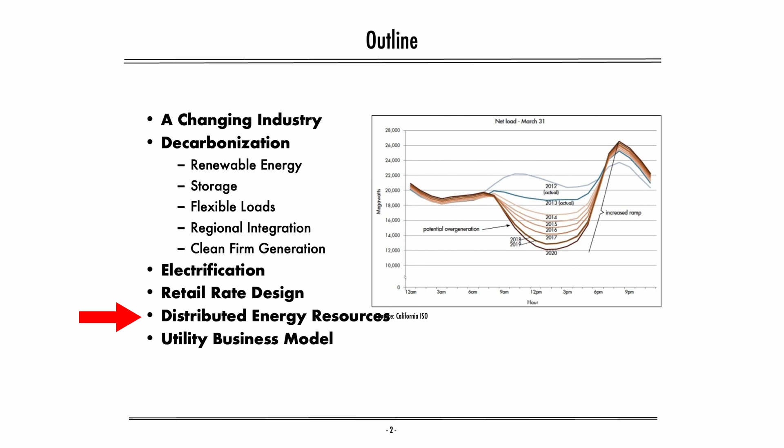So some of the big picture topics I'm going to talk about today are decarbonization, some different strategies for decarbonizing the grid, and things related to that - overall growth in electricity demand, how we charge customers for electricity, and how distributed resources play a role, resources not owned by utilities or government agencies. Hopefully we'll go through all of that.

So I think from a big picture perspective, the electricity sector is very unique. If you think about all the sectors in the economy, how many have been around for over 100 years that are still in existence? How many industries have grown and died? How many have been around that long and are still poised for exponential growth? There are very few industries that have been around that long and are poised for the transformation and growth that the electricity system is going to experience in this country and the rest of the world over the coming decades.

So I think it's a very exciting industry to be a part of because there are all these challenges associated with it. How can we meet this load growth? We'll talk about the sources of that load growth in a little bit, but they're changing almost faster than you can keep up with.

It used to just be, oh, we have electric vehicles and we're going to electrify buildings. Now we have data center load growth, artificial intelligence, cryptocurrency - all of these things adding up to enormous load growth. So how can we meet those increasing demands while decarbonizing, while keeping costs reasonable, while recovering those costs fairly, while doing all of that reliably? There's a lot of challenges, but I think those challenges are what make this industry very exciting, stimulating and fulfilling to be a part of.

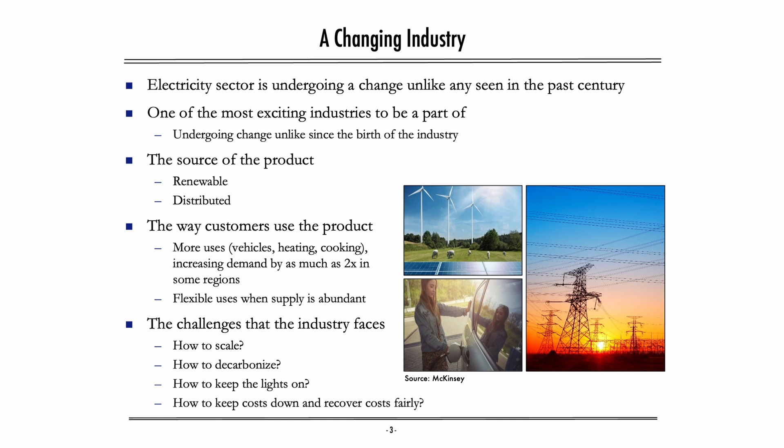So some of the changes against that backdrop that are happening in the industry that we're going to talk about are the source of where our electricity comes from. Historically, it was very large-scale, centrally owned fossil fuel power plants. Now the source of electricity supply is becoming more renewable, slanted towards wind and solar, and more distributed - not just centrally scaled, very large plants, but potentially rooftop solar or other smaller community solar type installations. And then the way that customers use the product as well.

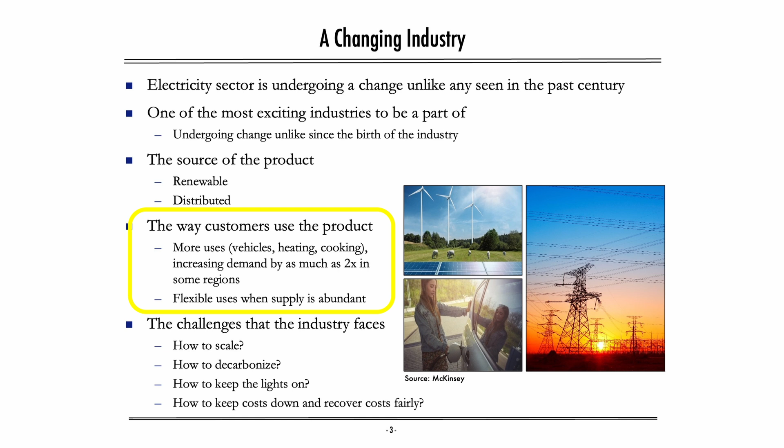This is in part what's driving all of the increase and forecasted increase in demand. The things that we use electricity for are becoming more and more prevalent. 30 years ago, if the electricity went out, maybe you couldn't turn the lights on or watch TV. Now, if the electricity goes out, you can't do any of those things. Plus, if you work from home, you can't work. If your home's heated with electricity, you won't have a warm home. If you charge your car, you can't charge your car. So the impact of electricity is becoming more and more prevalent in our lives, which puts even more emphasis on having a reliable grid and the impacts when we don't.

So lots are changing in the ways in which we use the product of electricity, and we'll talk about all those things. But I do want to first take a step back and look at decarbonization and why this is critical for the electricity sector.

From a big picture perspective, not even focusing on electricity, we emit a lot of greenhouse gases. Scientists have said that if we want to keep climate change to a reasonable level, defined as warming of no greater than 2 degrees Celsius, there will have to be greenhouse gas reductions of approximately 80% below 1990 levels within the coming decades. That's rough math, but more or less the scale of decarbonization needed to prevent the worst impacts of climate change.

So if you look at where all those greenhouse gases come from, about a quarter of them, at least in the US, come from the electric power sector. You can see a pie graph there on the right. Electric power is now the second biggest sector behind transportation, things like cars. Electric power actually used to be the largest, but there have been some recent emission reductions in electricity.

Generally electricity is kind of a double-edged sword, but it's probably the easiest sector to decarbonize. Even though it's challenging, it's probably easier relative to something like buildings, cars, or industry. A lot of that has to do with the fact that there are only a limited number of players in the electricity sector, so you can regulate and say utility A, do this thing, and they'll go do it. Whereas if you're trying to decarbonize industry, where there are 1,000 different companies, or transportation, where there are millions of individual customers, you have to deal a lot more with consumer behavior and other things.

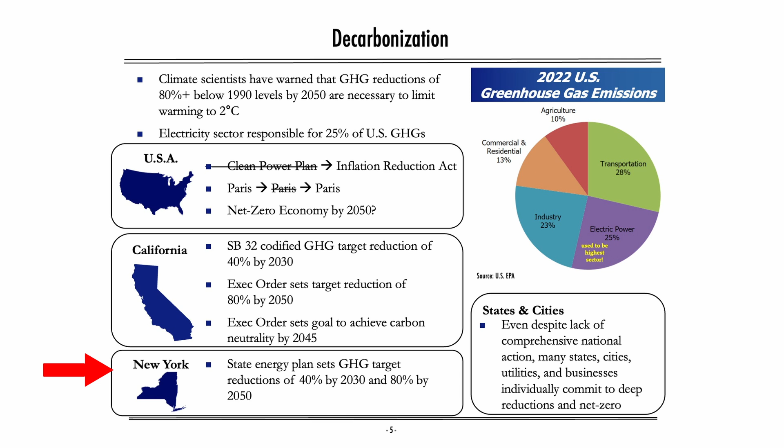But I think another double-edged sword of decarbonization policy is that within the electricity sector, most control of decisions around policy, utilities, and what resources get built doesn't actually happen at the federal level—it happens at the state level. So in California, we have different decarbonization targets written in law: 40% reductions by 2030, 80% reductions by 2050. New York has very similar goals. And even many cities that exist within red states also have decarbonization policies.

So much of the United States does have very aggressive decarbonization policies, even if there's no unifying federal decarbonization target. That means even if there are federal transitions one way, there's this natural buffer of policy at the state level—and it cuts both ways. That's a lot of what's driving a lot of the individual actions at local levels.

And beyond that, even if you have no policy in place, individual customers can make their own decisions to decarbonize. So if you look at a state like Texas that has very little policy, there's still tons of renewables in Texas, and a lot of that's driven by raw economics, but also customer choice as well.

This is kind of what, if we want to decarbonize, the magnitude of decarbonization needs to be—most of the greenhouse gases need to be reduced.

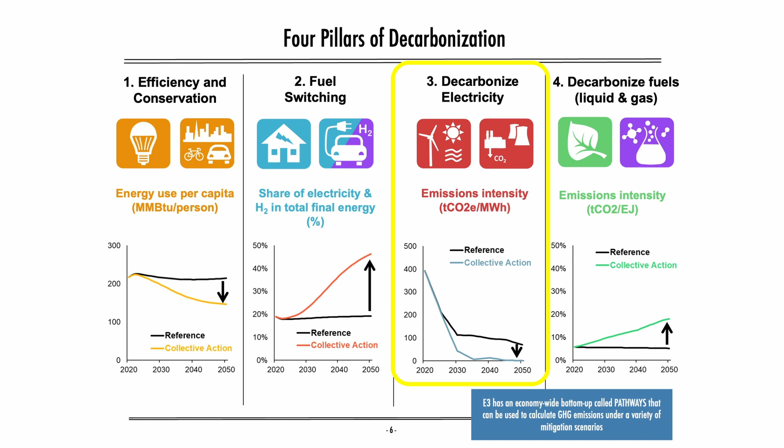I promised we were going to focus on this third pillar of decarbonizing electricity, and specifically talk about some of the challenges of using renewable energy to decarbonize the electricity system. So why renewables? Well, the primary reason that there is a lot of support and inertia for renewables relative to other sources primarily comes down to cost.

Renewables, as I said, when I was at Stanford, solar cost $250 a megawatt hour. A couple of years ago, solar cost $25 a megawatt hour. Now with interest rates, it's gone up to $35 a megawatt hour.

But still, it's roughly an order of magnitude lower than it was, and the same is true for wind. Particularly in the United States, we have tons of land, way more than most places. We are very lucky. Look at other countries like Japan, Taiwan, or parts of Europe - they're very much land constrained. In the United States, we have a lot of resource potential and we can build a lot of renewables at low cost.

At least historically, there was a lot of public support for renewable energy development. I think one unique thing emerging now that we need to grapple with is there's becoming more and more pushback against renewable development. There's basically pushback against development of everything - nobody wants any new fossil, nobody wants any new renewables. It's very hard to build transmission, it's hard to build anything. And it's like, okay, what do you want? What are we supposed to do here, short of just shutting down our economy? So historically there has been a lot of public acceptance of renewables, but there's increasing pushback against that, which presents a separate set of challenges.

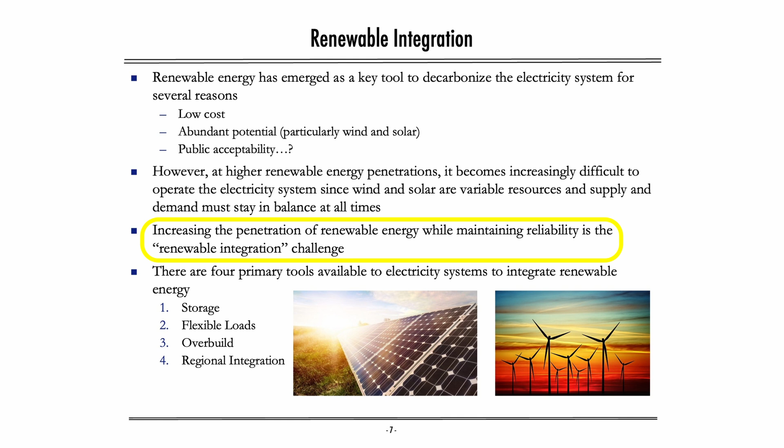But let's suspend that for a minute and assume we can actually build the renewables we need to build. The question then is, how can we actually use those renewables to decarbonize the electricity system? The primary challenge with renewables is that they produce energy when the sun is shining and when the wind is blowing, and that's not always lined up with exactly when we need them to be producing. So the challenge of matching supply with demand when we need it is the renewable integration challenge. There are a couple of different strategies for addressing this, which I'll talk through.

From a grid operation perspective, a key principle that has to be met to keep everything working is that whatever electricity demand is, the electricity grid has to produce that amount of energy or generation to match demand exactly. If demand and generation do not match, the grid will break, or there will be blackouts, or bad things will happen. So utilities or grid operators have to match energy generation to demand in every hour of every day of every year.

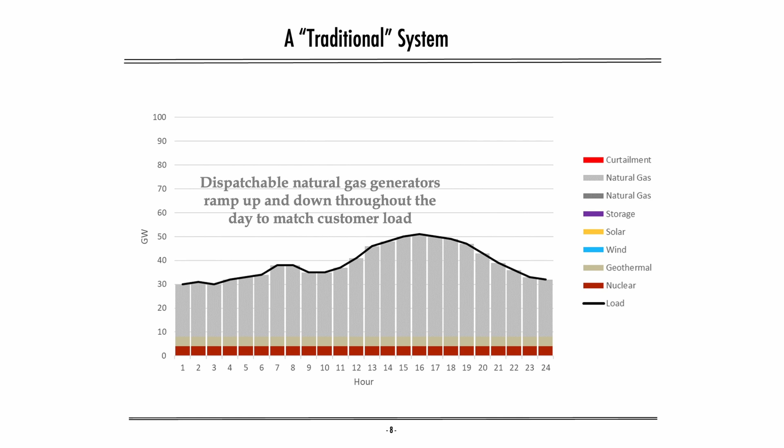You can see what we've done by adding renewables to this system is the total area of gray has gone down. And that total area is really the generation from natural gas, which is what leads to emissions. So if we're trying to decarbonize, we're trying to reduce the area of natural gas. We've gone from a lot of natural gas to less natural gas.

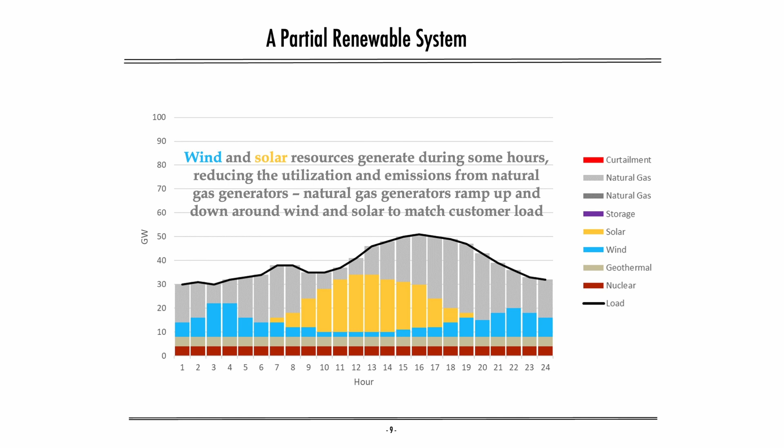So you say, okay, this is a great decarbonization strategy, let's just keep building more wind and solar. So what happens if you do that? Well, if you just keep building wind and solar, you can see these mismatches start to become more and more pronounced. If we just build a lot of solar, for example, what happens is that we now have hours in the middle of the day where total generation is exceeding load.

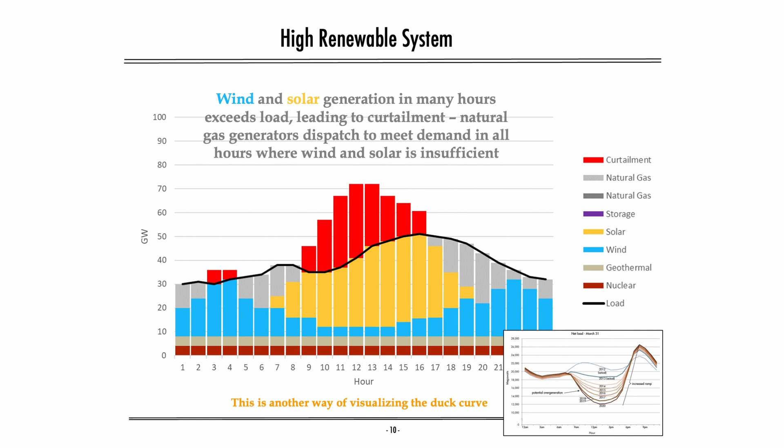But then simultaneously in the evening after the sun sets, there's not enough renewables to meet load, so natural gas generators have to ramp up. So the challenge here is that if we just keep building more and more renewables and do nothing else, there's going to be mismatches between when those renewables are producing and when we're consuming electricity, in a way that is not going to allow the system to fully decarbonize and will simultaneously result in wasted renewable energy.

So what are the solutions to this? This again is the integration challenge. So what are the solutions to fixing this issue and allowing renewables to decarbonize the grid?

Well, the first most obvious solution that probably everyone's thinking of right now is let's build energy storage. And that's a very elegant, simple solution. If you just build some batteries, in the middle of the day when solar is producing more than the grid needs, you charge those batteries. And then in the evening, instead of dispatching natural gas, you dispatch batteries, because batteries are something that, like natural gas, can be turned on and off. So what does that look like? That just looks like building some batteries.

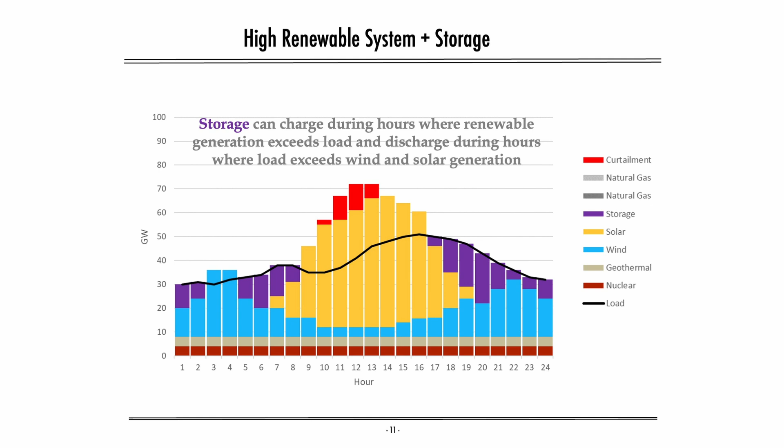So seems like an easy answer, right? But what's the challenge with this? There's lots of challenges, but one is the fact that batteries cost money. They're definitely a lot cheaper than they used to be, but they still cost money. So even though this is a technically feasible solution, it doesn't mean it's the most economic solution.

So what would be another alternative to helping match up demand and supply that avoids building this amount of batteries? Well, one solution would be to just change the way in which we consume energy or electricity. If we could consume electricity in a way that increases consumption in the middle of the day when there's a lot of solar on the grid, and decreases consumption in the evening when we would be dispatching natural gas plants, that could potentially be a way to reduce emissions that avoids having to build batteries. And we would want to do that if it's cheaper to modulate the way in which we consume energy than it is to make investments in resources like battery storage.

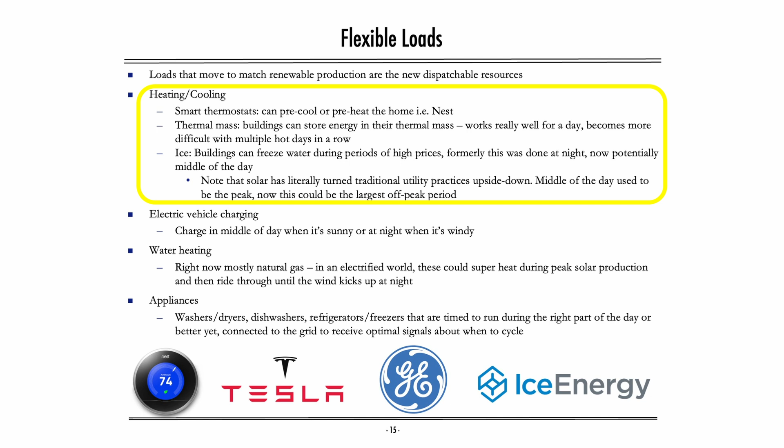But many loads can be flexible. So if you think about cooling your home, typically the way that works today is people go to work, they're not in their house because they're not home. Of course, they're not going to run the air conditioner. Why would you be cooling an empty house? So throughout the day, the home is heating up. Then they get home and they turn their air conditioner on.

And the house has to come back down to a very cool level right in the evening. Well, maybe it would actually be better for the home to pre-cool itself while the person's not there, get down to a very cool level, and then when the person actually gets home, the home's already cool and doesn't need to use as much electricity in the evening. So it's a strategy for shifting the time of day in which the home is cooling itself in a way that is more aligned with when the grid actually has low cost, low carbon energy available.

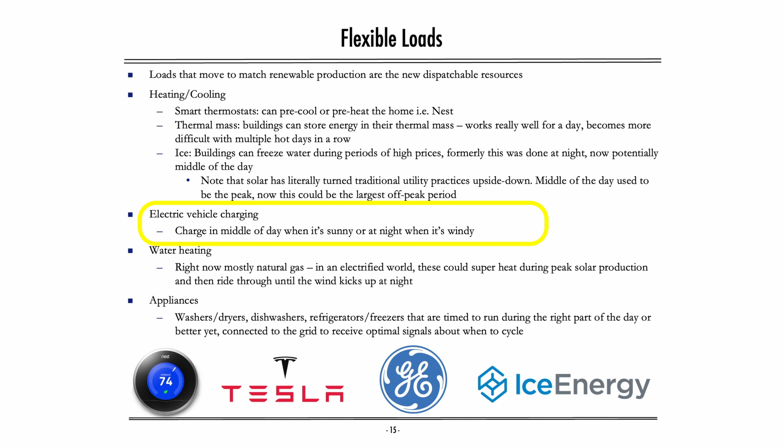That's just one example. Another example is car charging. So instead of, a typical base case scenario would be you buy an electric vehicle and you drive around all day and then you come home at 5, 6 p.m. and plug your car into your garage. Well, maybe a better solution would be if you drive your car to work, charge your car at work all day, and then come home, don't charge it, then go back to work the next day and charge it. So you're always kind of doing the base load charging at work in the middle of the day when the sun is out. That's just another strategy that California is looking at.

There's all sorts of strategies for loads that can be shifted. Again, not everything can be shifted, but many things can be shifted, whether it's when we heat and cool buildings, when we charge cars, when we use appliances. The smarter those appliances are, the easier it becomes to shift them around, right? We don't want us as consumers tinkering with these things and monitoring the thing. If you can just say appliance, run at the best time for the grid and for my electricity bill, and it will just do it.

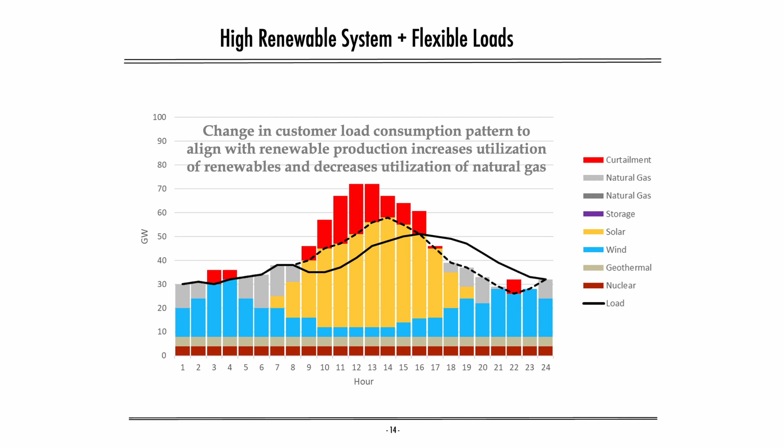So that is for flexible loads, that's some examples. And so again, flexible loads are just shifting how we use electricity in a way that better lines up with when renewables are producing.

So those are two strategies. I promised you four. So what's the third strategy? The third strategy is a bit unintuitive. And what the third strategy is, is actually kind of what I said not to do at the beginning. But what if we just keep building renewables? What if we just take this and just keep building more? And on the one hand, this seems like a bad solution because we get more and more curtailment, right?

That red sort of wasted energy. But on the other hand, it really is an economic question. If in fact it's cheaper to keep building renewables than it is to do other integration strategies like battery storage or flexible load, then this could be an economic part of the integration solution. And I put this here not to say that this is the answer or that we should do this instead of building battery storage or instead of using flexible loads. The reality is that a least cost electricity system is going to do all of these things to a certain degree.

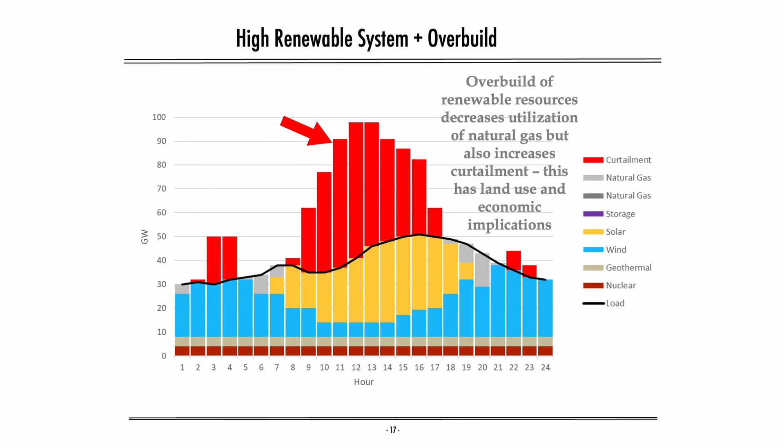And the point is that if you look at a cost minimal system that has a lot of renewables and is deeply decarbonized, there is going to be some curtailment. We don't need to worry about eliminating all of the red excess generation on the system. Sometimes there's going to be that during certain times of year or certain times of day. That is part of a least cost solution. So I think that's also something that is not initially intuitive when people think about decarbonizing the electricity system, sort of accepting that a least cost solution is going to involve certain hours of the day or of the year where we're curtailing renewables, and that's okay.

And increasingly, if we can get more and more flexible loads that can figure out things to do with this potentially free energy, then that's going to be something that emerges as well, right? There's a lot of new loads that are extremely flexible, like hydrogen or cryptocurrency, etc. And to the extent that those loads can figure out something to do with that energy, then that's fantastic as well.

So that's the third solution. And then the fourth solution is also kind of a bit unintuitive, but it's what if we change the geographic scope of the grid? That is something called regional integration.

Right now, at least in the Western US, we have a very fragmented grid. We have about 38 different balancing authorities covering the western half of the United States that are all operating relatively independently. There are increasing movements to better integrate those that are actively underway right now, but at least historically, they've operated very independently.

The benefits of more tightly integrating all of those together are that there is a lot of regional diversity in how renewables produce energy. So for example, it's generally not cloudy everywhere. If it's cloudy in one place, it might be sunnier in another place. If it's less windy in one place, it might be windy in another place. The broader the geographic area you can aggregate renewables over, the smoother those renewable production profiles become.

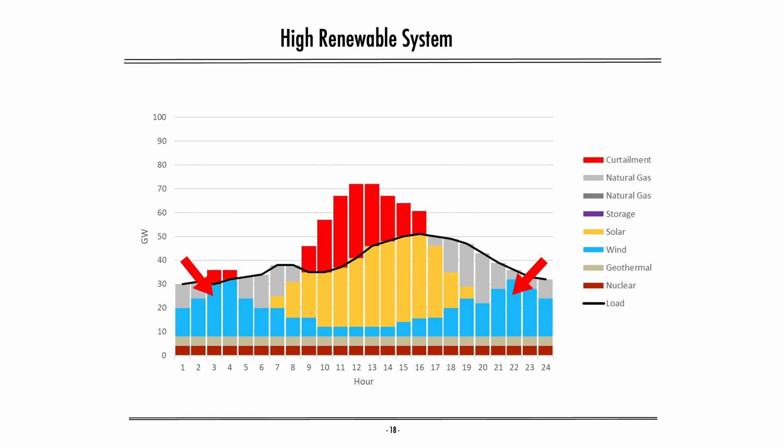This is illustrative, but the point still stands. Here we have a tip, this is like one place on the electricity grid. We have sun that's rising and setting with the sun at that place on the grid. We have wind that is relatively volatile, right? We have a lot of production in the morning, it ramps down in the middle of the day, ramps up production in the evening.

But if we were to aggregate over a much wider geographic area, those profiles become smoother, right? Particularly for solar, you now have multiple time zones where the sun is kind of overhead for longer because it's rising earlier in the morning, setting later in the evening when you look at multiple time zones. And wind, there's just more ability to balance out low production areas with high production areas.

Another eccentricity of the grid in the United States is that it's actually 3 different grids. We have a Western grid, an Eastern grid, and Texas. I think probably you covered that. Those are electrically separate, but if we could somehow interconnect those grids more closely, there could be a lot of benefits.

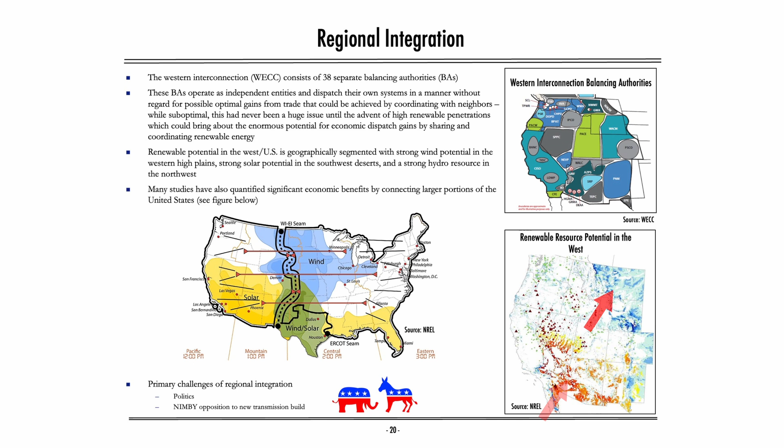Even if you look in the West, say we're never going to connect the West with the East, but if we just look at the West, we have a lot of solar down here, a lot of wind up here, and then the Pacific Northwest is probably the hydro capital of the world. So if you could find ways to allow those to all work together, that's going to decrease the need to do everything else, right? Decrease the need to overbuild, decrease the need for energy storage, decrease the need to do flexible loads.

But a lot of the challenges of regional integration are not a technical challenge, they're a policy challenge. So even in the West, you have states that don't want to be associated with each other.

California does not want to be associated with coal-burning Montana, and coal-burning Montana does not want to be associated with hippie liberal California. So getting an acceptable governance structure for a West-wide grid is challenging.

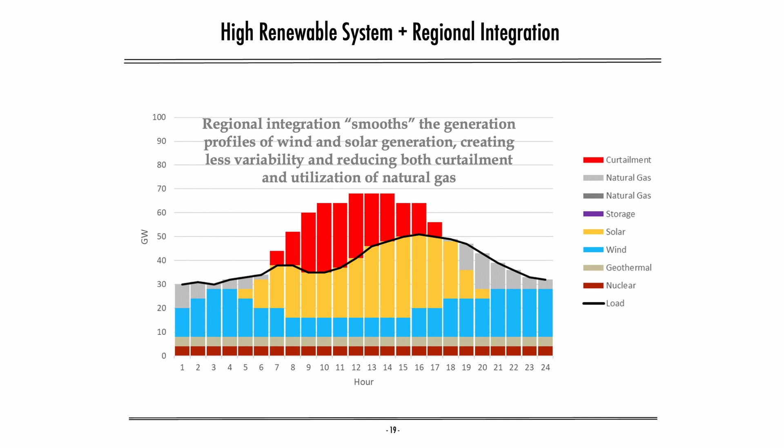The final thing I want to talk about from an integration perspective: we've gone over the general challenges and strategies, but it's important to note this is just one day. We've been focusing on one day, which is good for getting the concepts down, but every day is vastly different. You have days where it's really hot and people are using a ton of air conditioning, so loads are very high. You have days where it's cloudy and not windy, so solar and wind output are both less. All of these things are moving around all the time.

From a reliability perspective, which is keeping the lights on, that's an all-the-time problem. You can't say, 'well, it's cloudy today, so we're cutting off electricity.' So it becomes necessary to look at all the potential conditions that could happen on the grid. That's where the last integration challenge comes in—and probably the thing I personally focus on most and think is coolest—the need for firm generation, particularly clean firm generation.

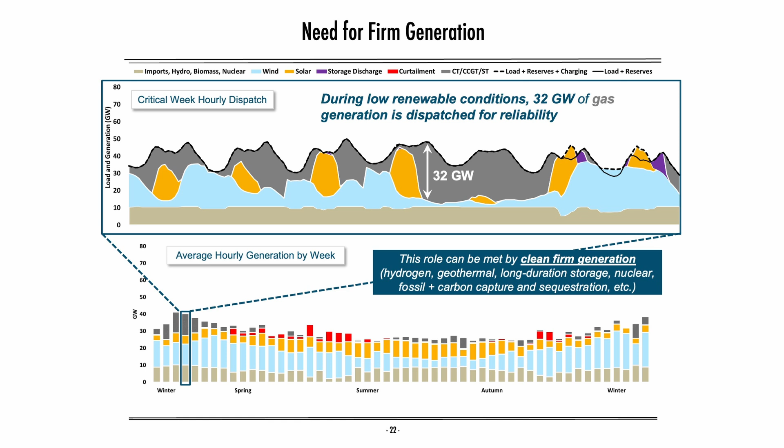The problem is, what would that look like? If we build wind and solar for the worst week, on all the other weeks where we already had enough, now we have way more than we need. That leads to all the extra curtailment shown here in red. So is this an economic solution? Probably not. Not only is it wasteful to build more wind and solar, but it also takes a lot of materials and a lot of land. So beyond economics, there are also environmental implications of more materials and more land.

This is the New England study I've been referring to, and this is kind of what that looks like. If you plug everything I just talked about into an optimization model, and say, I know I need to meet electricity demand in every hour of the year, these are the resources I have at my disposal, taking into account all their variable production profiles, and I want to do it in a least cost way—what's the optimal mix of resources? This is what an optimization model will output.

This is another common type of analysis done in the electricity sector. One key takeaway is that a least cost system has a diversity of resources—there is not one least cost resource. You'll often read articles saying this resource is now cheaper than that one, but that's not really how it works. Resources are cheapest when they work together, because they have different characteristics. Comparing the cost of natural gas to solar, or coal to gas, or coal to solar, or coal to wind, is something the press loves to do, but these resources have such different characteristics that it becomes a meaningless comparison. In fact, a least cost system has a diversity of resources.

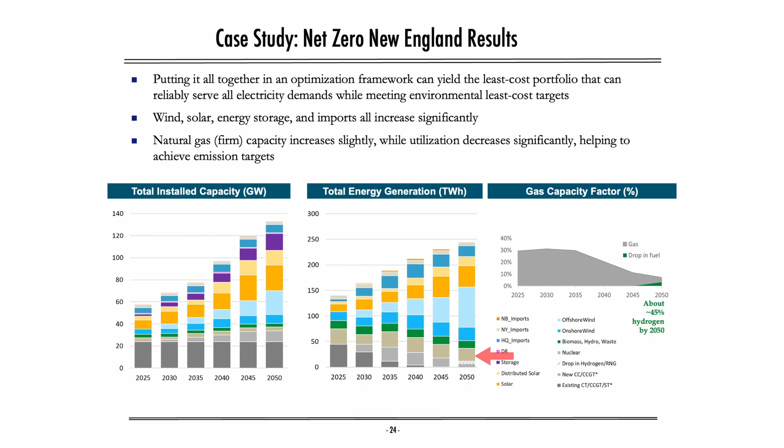Just because you have a resource installed doesn't mean you generate energy from it. We need a large base of dispatchable capacity that's actually growing over time for reliability, but because we're building renewables, we can use that less. Using a resource like natural gas is what creates emissions, so we should focus on reducing its usage, not its installed capacity. Because when you need it, you need it—when the wind and solar stop, you'll be glad you have it.

That's an overview of decarbonizing the electricity supply. Now I'll jump to the other side of the equation: electricity demand, particularly electrification.

From an economy-wide perspective, decarbonizing the economy likely requires significant fuel switching: transitioning gasoline and diesel-powered cars and trucks to electric ones, and transitioning buildings heated with natural gas or oil, or that use gas for water heating. All of those can be readily electrified—there are electric vehicles for transportation, and the workhorse of the building sector is the electric heat pump, a very efficient way to heat buildings with electricity.

Then there's one my mom's least favorite: transitioning gas stoves to electric stoves. Cooking is a small percentage of total building gas use compared to heating and water heating, but it's the most controversial—there are restaurant unions and organizations protesting getting rid of gas stoves in Los Angeles and other cities around the country.

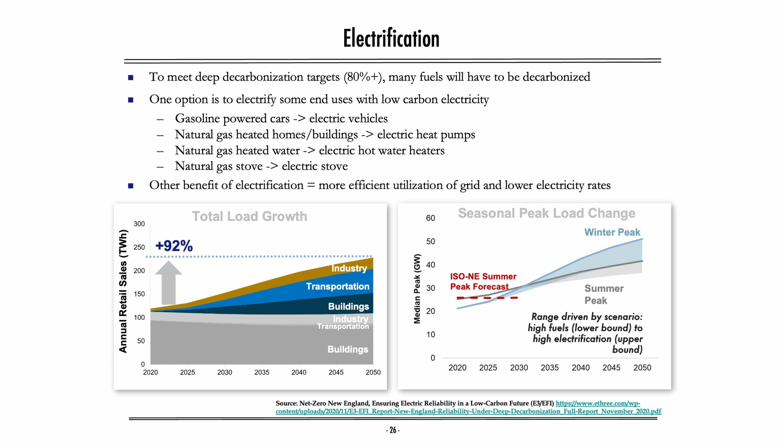This graph on the left shows the change in electricity demand between now and 2050, from the same New England case study we've been discussing. The gray bars represent existing electricity demand, and the colored sections show sectors experiencing growing demand—primarily buildings, transportation, and industry. New England doesn't have a huge industrial base, so there's less industry to electrify there compared to, say, Texas or China, which have more potential for industrial electricity demand growth. But in New England, it's primarily transportation and buildings driving the increase.

That's something like a 92% increase—close to doubling electricity demand. That's a lot, particularly in a place that doesn't have much land and is very averse to new development, similar to everywhere else. So we have this growing demand, but we don't want to build anything new—at some point, something has to give.

The other thing about increasing demand and load growth is that it's not just the total quantity that's growing, it's also the nature of how it's growing. Right now in the U.S. and most grids worldwide, peak electricity demand—which from a reliability perspective must be met, since we need enough generation to cover the peak—occurs in summer when it's hot and everyone runs their air conditioners. That's the planning criteria most grids are built around. But increasingly, as buildings electrify, more demand growth will come in the winter.

When you are now using electricity for heating, all of a sudden you're growing electricity demand much more in the winter than in the summer, and systems are going to start to become winter peaking. If New England decarbonizes the way we've projected in this study, the system will become winter peaking. This trend holds not only in New England, but in many other parts of the country, the Pacific Northwest, even California. So that's an additional challenge in thinking about how you can match supply with demand in every hour of the year, thinking about these new winter peaking loads.

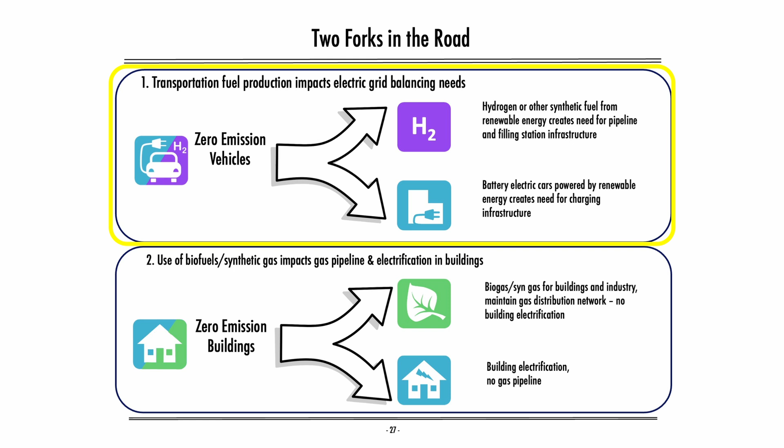The cases where that is true is when really large infrastructure investments are needed. For example, if we think about decarbonizing vehicles that today run on gasoline and diesel, there's two paths you could go down. One, you say we're going to go down an electric vehicle path. The other would say we're going to go down a hydrogen vehicle path. You probably don't want to build out the infrastructure for both and then see which is cheaper. You don't want to build a bunch of charging stations and a huge hydrogen pipeline network, and then let the market compete. Somebody needs to say, okay, this is the path we're going down, we're doing electric vehicles, we're going to invest in charging stations, and we'll never know what the world would have looked like with hydrogen. We need to do studies to make the best guess of what the most economic and feasible solution is, but we don't really want competition from that perspective.

The same is true for buildings. Hydrogen vehicles - I don't know anyone who's strongly advocating those, but buildings are much more of a wild card. There's a big movement to electrify buildings in many places of the country, including California. There's also big lobbying from the gas industry to decarbonize buildings with zero carbon gaseous fuels, particularly gas utilities that want to continue their business. In Southern California, there's the electric utility, SoCal Edison, and the gas utility, SoCal Gas. Those two are at odds with each other - one sees a decarbonization future of electrifying buildings, another sees a decarbonization future of low carbon gas delivery. That's a policy decision that ultimately has to get made, because again, we probably don't want to do both.

Okay, the other piece of demand - we're still on the demand side here - is thinking about consumer behavior and how you can actually incentivize them. We talked about flexible loads, getting people to consume energy in the middle of the day instead of in the evening. That's a great idea, and there are many technical options for that, like smart thermostats or charging your car at different times. But the question becomes, how do you actually get people to do that?

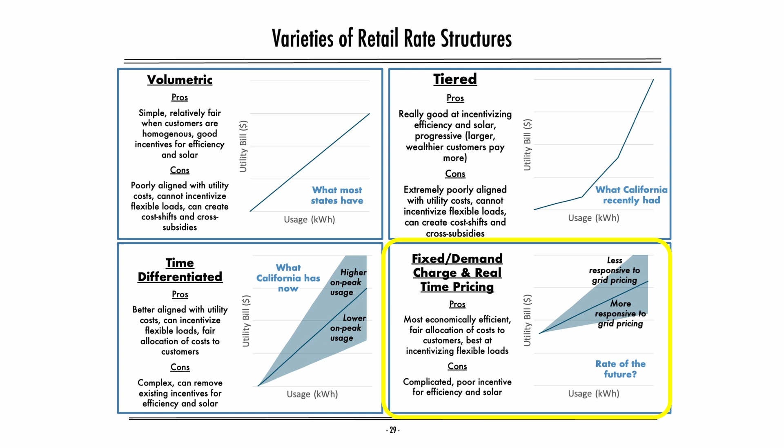This says every customer, regardless of how much they use, is going to pay some fee just to be connected to the grid. And then we're going to charge people for electricity above and beyond that. The benefit of that type of structure is that if the utility can recover some of its costs from just fixed payments, then it doesn't have to charge as high of a price for usage. So the slope here is just lower - the cost per kilowatt hour of electricity has gone down, and that creates even more of an incentive for people to increase usage through electric vehicles and building electrification, because you buy an electric vehicle and your bill is not going to go up very much.

One of the things California is also looking at in deciding what these fixed charges are is income. This is something that probably at this point is not going to happen - it keeps changing, but it's California's attempt to say, we used to have a progressive rate structure where we put more costs on higher income people. So we're going to try to do something similar with fixed charges, but it turns out that might not actually be feasible or legal. So that's being debated, I think, as we speak, at the legislature and utility commission. So TBD exactly what happens on that front.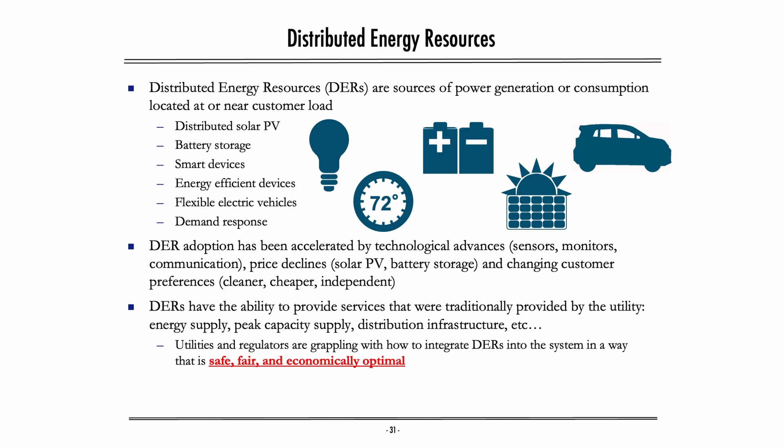These are options available to customers today that have not historically been available. There have been a lot of technological advancements that have enabled these, and a lot of price declines in these technologies, particularly things like solar and storage, that have made it more economic for customers to do this. And oftentimes customers just want to do these things - they want to take some control over their own energy usage in a way that's not just buying power from a utility that they might not like. And in California, that's more true than in many other places.

But the question really for distributed energy resources is, how can these resources integrate into the system in a way that's fair for everybody? A lot of the challenges come from things that seem really great initially but might have some unintended consequences in the background. I think a prime example of this is a policy we've historically had in California to incentivize rooftop solar called net energy metering.

What net energy metering, the way it works historically - and this is a policy not just in California, it's in many states - is that it allows customers to sell power back to the grid at the same price the utility was charging them for power. For a customer that has solar, this is going to happen a lot, because you put solar on your house in the same way we were looking at a grid that had a lot of solar that was over-generating in the middle of the day. Chances are, if you put solar on your house, in the middle of the day when you're at work, your solar panels are going to be generating more energy than your house is actually consuming. Maybe your fridge is on and a couple other small things, but generally you're not consuming much electricity. So those customers are sending power back to the grid, and they're able to sell that power to the utility for the same price the utility was charging them for power.

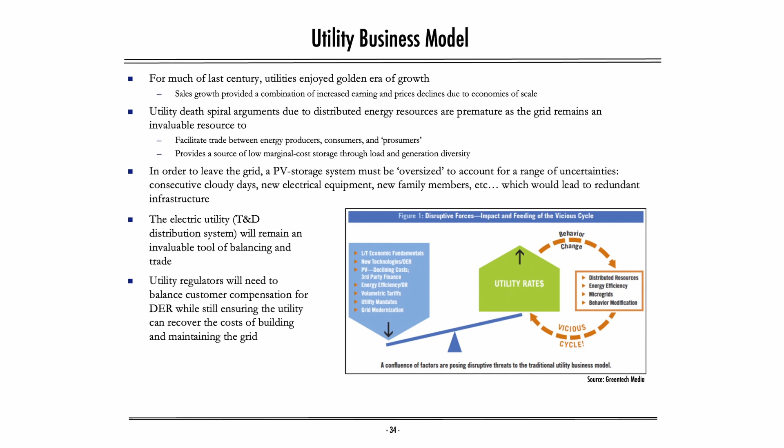And that doesn't mean that people can't put rooftop solar, but it does mean that it's not going to be economic to cut the cord. You're still going to need the utility to help balance things out, and those customers should still be paying their fair share towards grid costs as everybody else. Thanks.